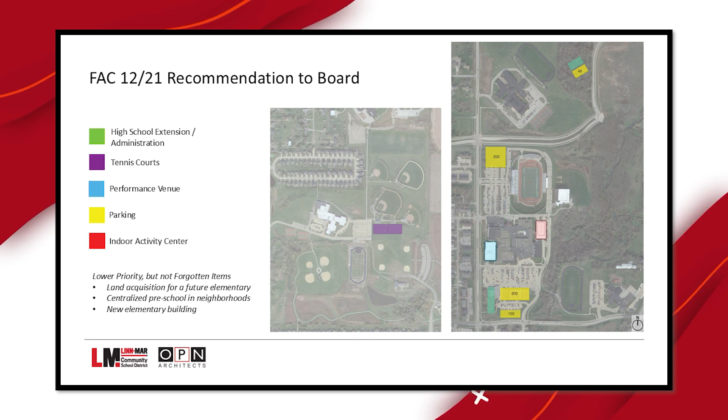So fast forward now, intermediates are open, we reconvened the facility committee, and the board came up with a list of projects in this rendition of our facility plan. The high school extension administration building, renovated the old LRC that's now the AEC, the tennis courts, the performance venue under construction, a couple different parking lots - the lot to the north, west of the stadium, plus part of a parking lot added for this project. And lastly, the indoor activity center, which is why all of us are here.

So graphically, for a timeline: parking was added so we could put in the new tennis courts. The admin building was built so we could do the renovation to the AEC. The new auditorium is under construction, and we're here in the design phase of the indoor activity center.

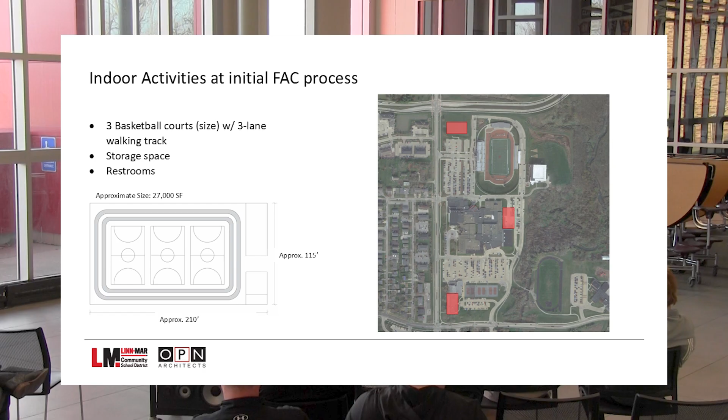So the indoor activity center - what was the project that was approved, the initial concept of what this would look like? Really it was 3 basketball courts in size, a 3-lane walking track, with some storage and restrooms needed. Pretty basic.

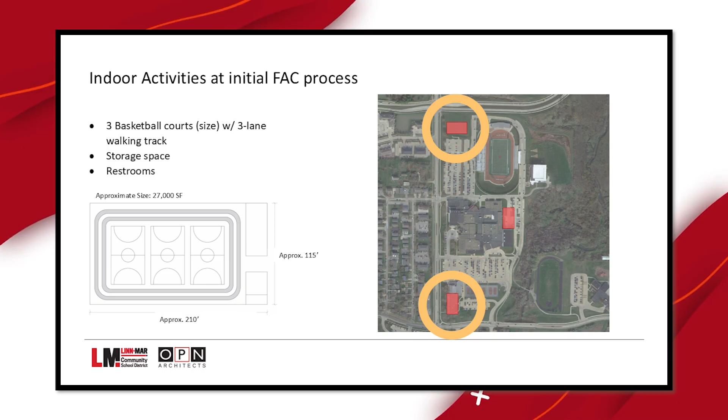The areas identified for this were: does it replace the AEC? Does it go where that new parking lot is now? Or where does it fit so it could be attached to the high school? Looking at how landlocked we are here, there was really only one spot - east of the wrestling room, north of the gym. There's the big hill up there, and a cell tower. That was the space identified as what really works and fits our needs.

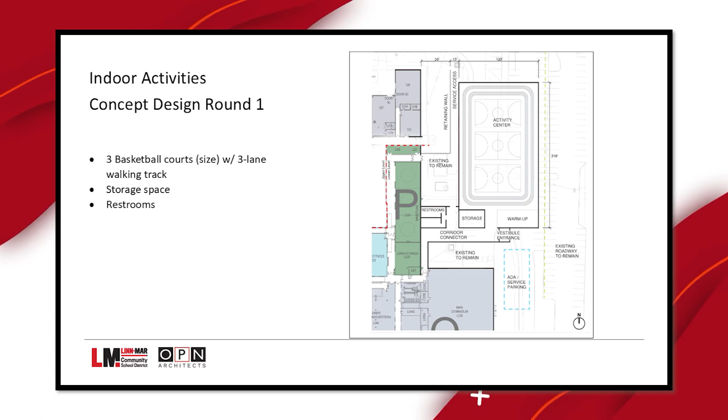So this is showing what that looks like. That was really as big as that addition could be because of the constraints we have - keeping the drive around, the hillside, the existing building, and a bunch of utilities. So we made that work to say, here's the best we can do.

So what's changed from that initially approved project to where we are now? Well, a little bit of clarity. I think some members in this crowd and others had said, hey, I know we're doing this indoor activity center, but what about all these other needs that have come up? We kept getting conversations around that within our stakeholder meetings, and from outside groups via emails and phone calls - things like, what else is out there? This is nice, but there are other needs here at the high school. Does it make sense to address this now or what?

The other things that came up: a storm shelter requirement. As part of the performance venue, there are 2 storm shelters that will hold the capacity of that venue, roughly 1,200 people. The city has told us that the next time we do any major work at the high school, we'll have to provide a storm shelter holding the remaining capacity of the high school, roughly another 1,200 to 1,400 people. So we weren't planning for that at the time for the indoor activity center. How are we going to do that? That was a big change.

Really, there was consensus that this needs to be attached to the high school so it's not a standalone facility, so it can be used during the day and share some of the other amenities we have at the high school at the same time. Also, girls wrestling was sanctioned after the initial project. Quickly it became clear we don't have enough space to have girls wrestling and boys wrestling at the same time, plus all the club practices that support our younger students in the district's wrestling program.

As you can see, those are some of the top things: needs to be multi-use, weight room, track, locker rooms, the location. We really identified a lot of different aspects, and we had a lot of different viewpoints of what was important to them individually. We put them in small groups to figure out what were the things we needed in this project.

We also went on some benchmarking trips. We visited Mason City's Activity Center, the Clear Lake Wellness Center, the Wartburg Waverly Sports and Wellness Center, and the Cedar Valley Sportsplex. I think all of us had some ideas, but a lot of us are visual learners, and actually seeing what could be or what existing spaces are in other places helped us say, yeah, this is what we want. I think that really helped our design team understand what our needs were if they could see that as well.

So these were some of the initial designs, the OPN's first draft and second renditions as we went through things and got feedback on how things laid out and worked. You can see there was a variety of different solutions that we refined, got feedback on, and refined again, and then more feedback and refined again.

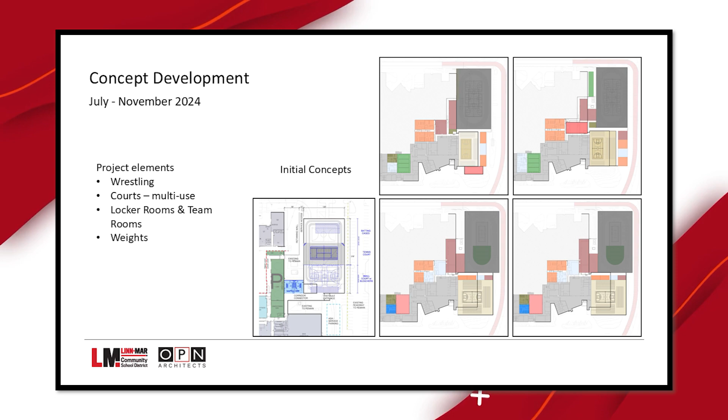So really the elements are the wrestling rooms, the courts, multi-use space. I think multi-use was maybe one of the highest priorities—how can we get a facility that can be used by all sports, all activities, and not just zoned in on one small group. Locker rooms and team rooms need updated, and then the weight room.

So here's the schematic design we landed on, and I'll walk through this a little bit. To the north here would be our storm shelter, with the ability to add 4 wrestling mats. Because it is our storm shelter, we also have to have restroom facilities in that—that's part of the code.

You see the orange area on the right, that's a couple team rooms. If we move to the left past the existing 3-mat wrestling room, that's the existing locker room area, which is really just being renovated into 7 smaller locker rooms to give flexibility to meet the needs for PE and for our teams depending on the season. When hosting games, we'd have the ability to put those teams in their individual locker room without having to walk through the same locker room space that someone else may be in.

Area D down there, the big green square, that's the existing auxiliary gym. That would turn into our turf area. We'd have batting cages that could be used by football, softball, baseball, soccer, golf, you name it. And then the existing locker rooms there, we would renovate into a team room space.

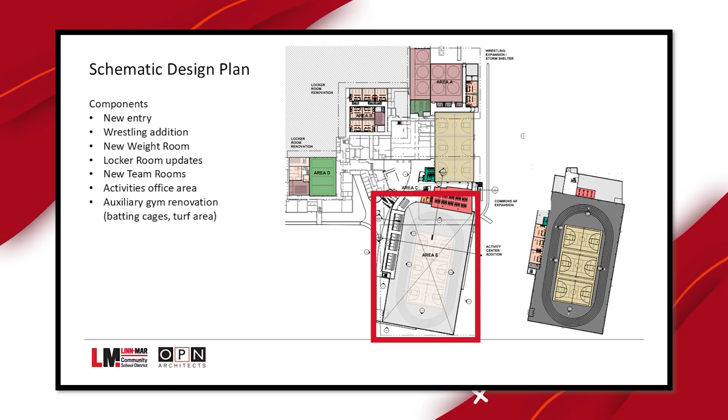And then obviously there, area E with the track, 3 basketball courts, and then a 200-meter indoor track, so we would have the ability to host an indoor meet if we wanted to. I think that was kind of one area as we were going through the iterations. It's like, yeah, we need a track area, we don't need to be able to hold competition. So 3 lanes, if it's not 200 meters, that's fine.

And then I think a lot of us came to the realization that we're going to build a facility that's almost there to hold a 200-meter track. If we don't do this in this rendition of it, Linn-Mar will never have an indoor track. So it was kind of one of those aha moments — if we're going this far, go the whole way so we have the ability to host an indoor meet if we would like to.

I think I'm going to pause there for any questions, because I know some of you, this is the first time you've seen this, and I've done it 100 times, so I know it in and out, and I probably glazed over something. Any questions? Or Jeff, Tanya, Chris, any of the committee members, if you guys have anything to add, I can hand the mic off as well.

With a schematic design, you can still say, well, there's room on the ends. You could still outline courts. You could put more types of places on that, if that's what people wanted to do during the design phase — those things can still happen. So it's not just defining the space that's the only thing it can be. Once the design phase happens, you can use it for whatever you want it to be.

Also, those aren't just basketball courts. There are also volleyball courts in there as well. So I just want people to know it's not just focused on one sport.

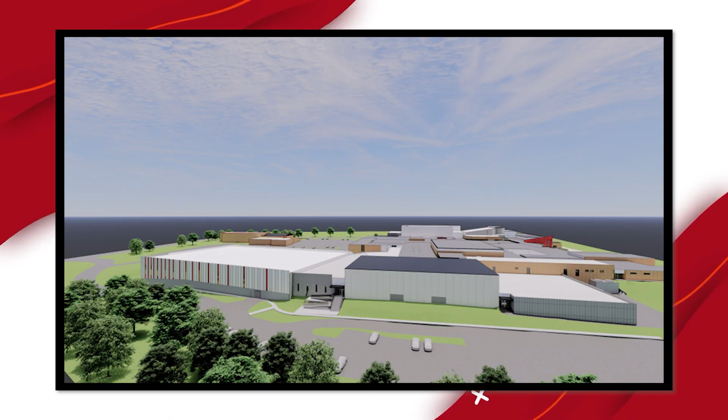All right, so here's kind of some renderings of how this lays out on the existing site. So the large box here in the middle — this is looking at the area from the east side — that large box in the middle is our existing gym. So to the left of that would be the indoor activities center, that would be the addition. And then to the right of that is the wrestling storm shelter addition, this area over here.

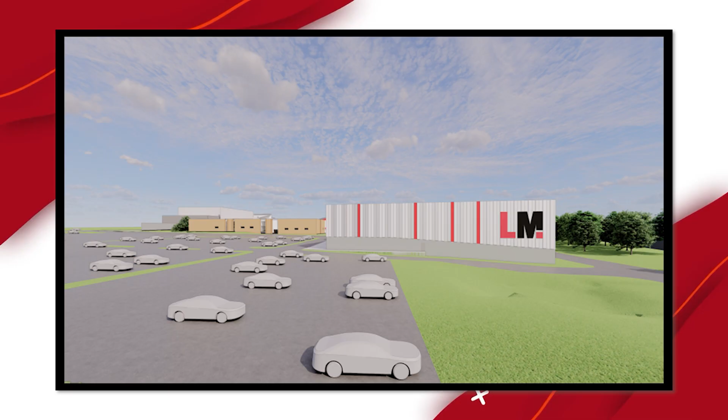This would be looking from the south, so kind of where the existing tennis courts are, looking up — that's a profile of the addition. This would be standing on the west, maybe just south of the new performance center and looking back to the east. That would be the outside of the performance center there.

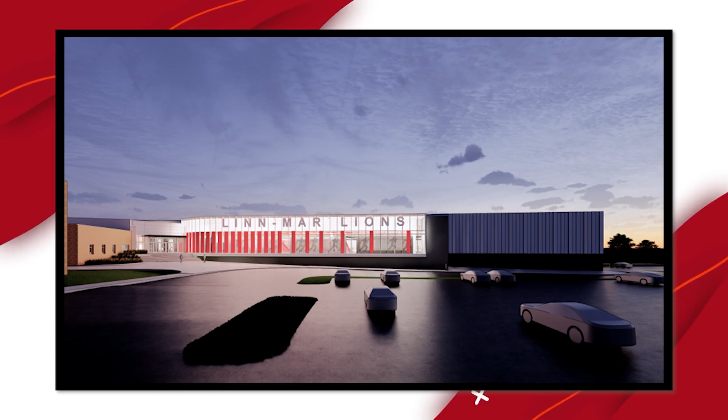At night, one reminder as I look at this, because I think this is a pretty cool image — remember, right now these aren't necessarily design solutions, these are options. So don't snap a photo of this and then expect it to look exactly like this when this gets built. That's possible, but these are just solutions to have an idea of what this could potentially look like. This would be walking up to the entrance.

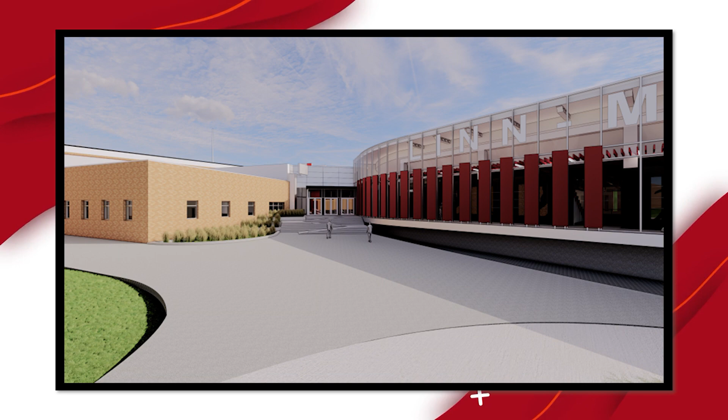And this is just as you get inside the entrance. So the lion head in the background, that would be the new activities office. Just to the right, where you see some people standing, that would be overlooking the indoor activities center. And then back behind the LM, that would be our entrance into our gymnasium.

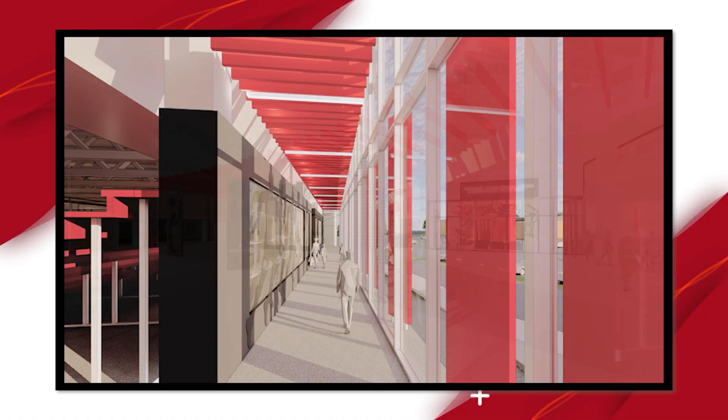This would be a hallway behind the bleacher seating in the indoor activities area, with windows looking outside. On the left would be an area for trophy cases and display cases, to gather all the accolades students have won that are scattered throughout the building in areas the public doesn't get to see. This would give us the ability to display that for everybody in one location.

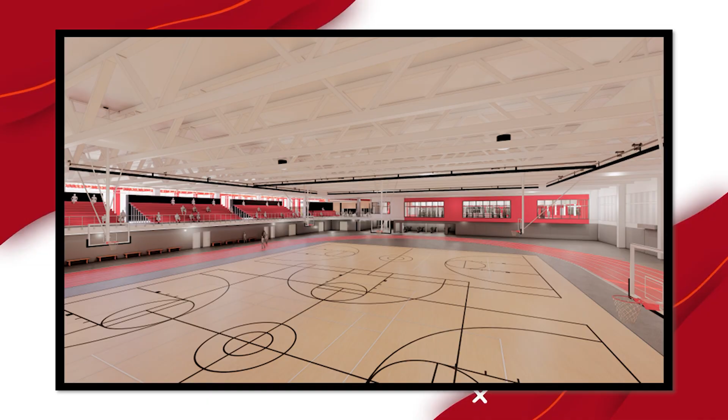All right, so this is looking at the inside of the activity center. Right now you're on the south side, looking north. Where you're standing now would be floor level to where Renee and Riley are, kind of our existing floor level here. So you can see court level and track level in that space is depressed.

As we look outside compared to where we are here, the grade changes quite a bit to the south. So the gym floor level of our existing gym is much higher than what it will be here. So we'll have a nice area up there to look out over this space.

One really unique thing about this facility that I don't think we saw anywhere else is the bleacher seating. So when we're hosting events in this area, we have the ability to have a crowd that isn't on movable bleachers on the floor level.

So if we're having a little kids wrestling tournament, there's some space up there. Even if it's just practices, no matter what level, if you have parents there for an open gym, you still have the ability to have separation so our coaches and players can do their things on the court or track, but parents can still oversee, without being in the huddle per se. Jeff, did you have anything to add on the bleachers while we're on this page?

I was just going to say, if anybody's ever been to an activity with a large number of people, if you don't have seating, the activity can still happen, but it's a miserable experience for people watching. That's one thing that when they built the aquatic center was consciously made sure the seating piece was there so people could enjoy the experience. I think that's the same concept being used here - we don't just want people to feel miserable while they're here, we want them to actually enjoy it.

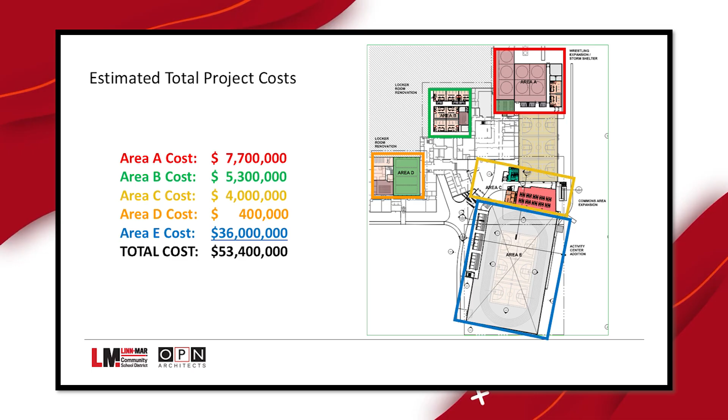Right now we have 2 options. We could fully fund this out of SAVE, our sales tax revenue, a 1 cent penny tax generated throughout the state, allocated per pupil to districts. The other option is we could partly pay for it out of SAVE and partly out of PPEL. There are pros and cons to both approaches, but both would be able to fund this $53.4 million. The board has that information, and as we go through they'll have a decision to make on which direction they'd like to go.